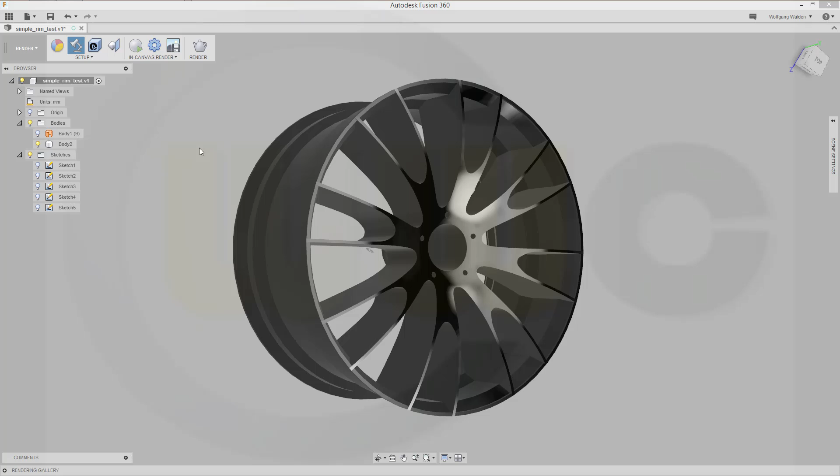I want to do this exercise. I called it a simple rim, and I did it a while ago in other programs. So let's start and have some fun with Fusion 360.

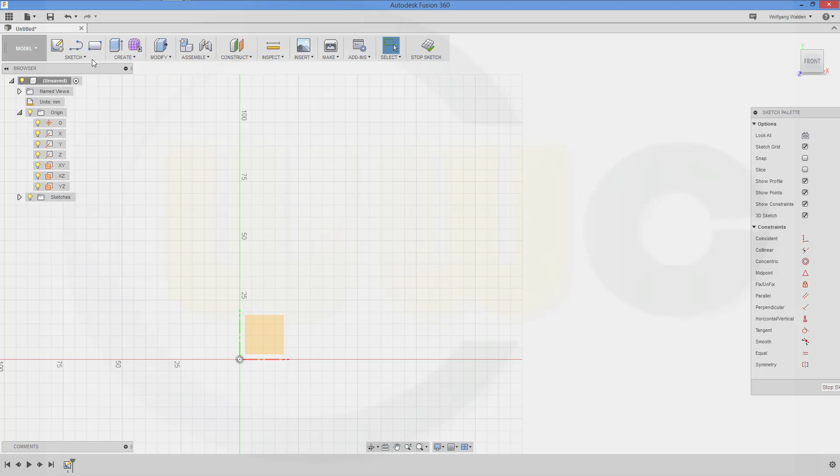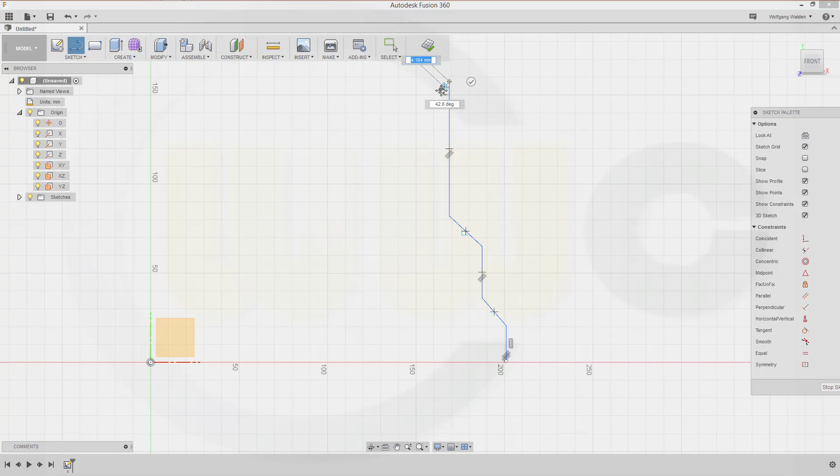As usual, we start with a sketch. So let's go for a sketch on the XY plane, and this might look something like this: up, up, up, okay.

Now let's check that's okay. Give it some dimensions.

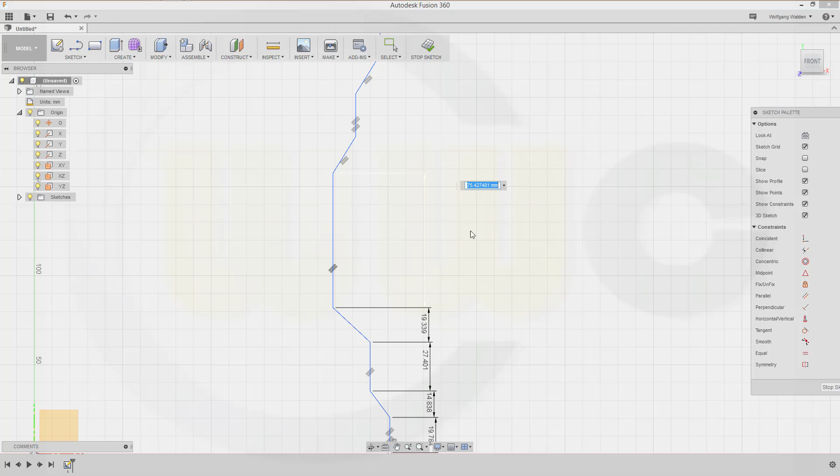Just use the dimension which you just sketched, and I will change them afterwards.

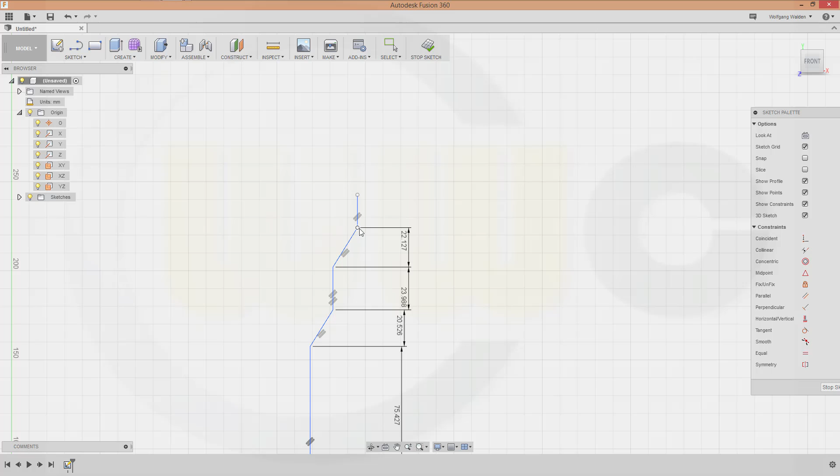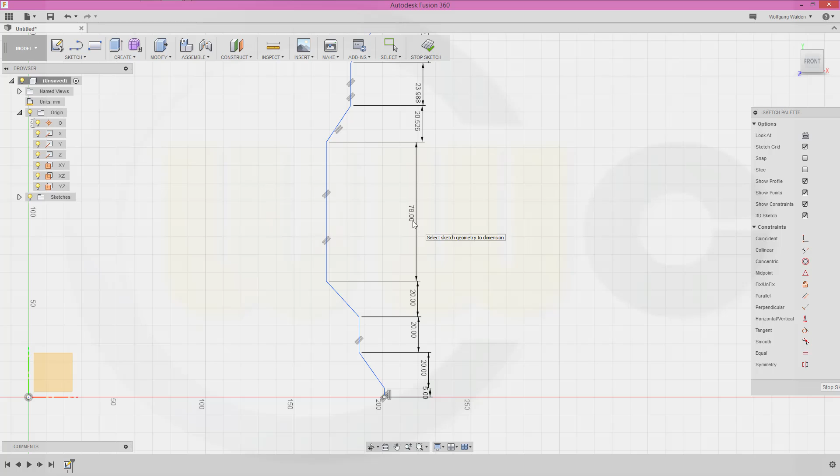Okay, now let's change them. This should be 5, 20, 20, 20, 78, 20, 64, 20, and 5.

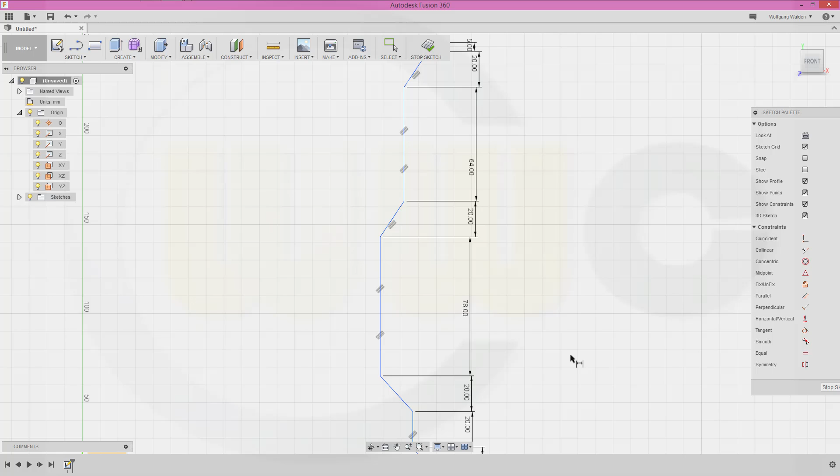Okay, add some more dimensions. Maybe I project that. Oh no, it's okay. So...

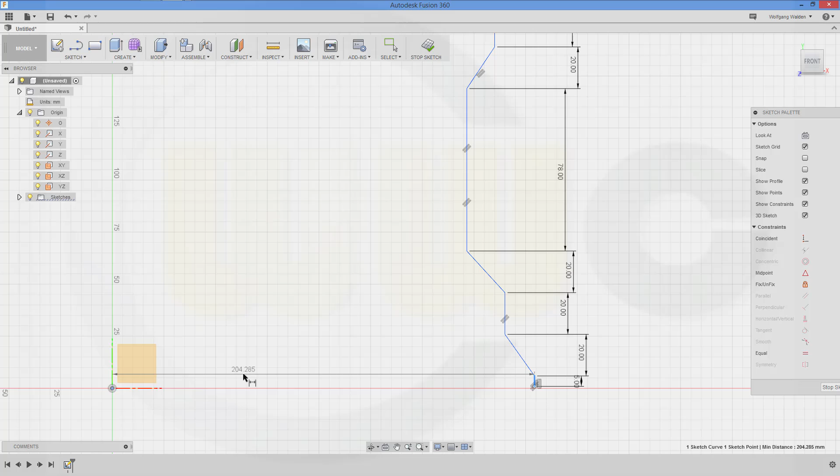From this line to that point, this should be 245. This might be 232.

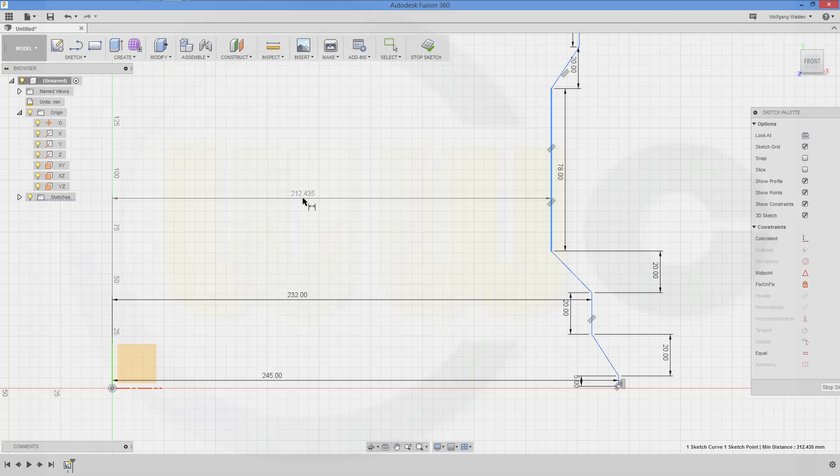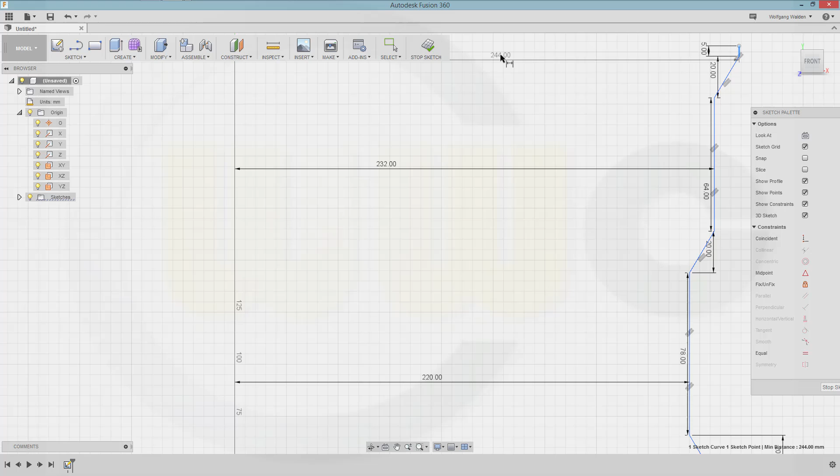This might be 220. This might be 232, and that might be... seems...

So. Let's align that line with this one because it's the same. Okay.

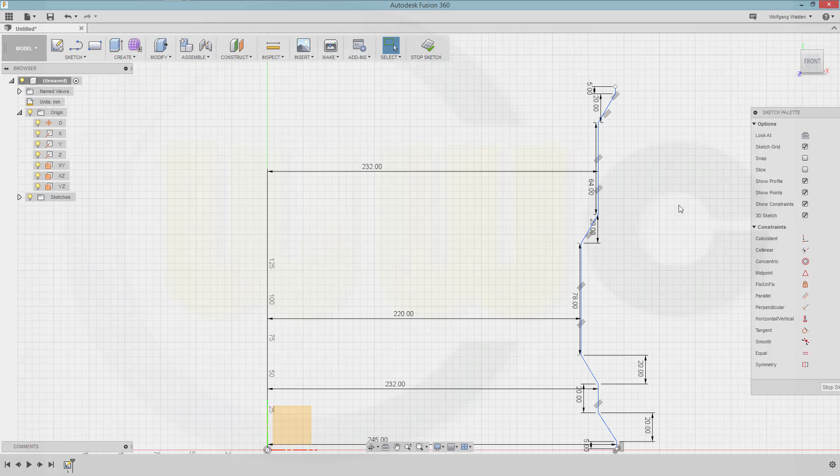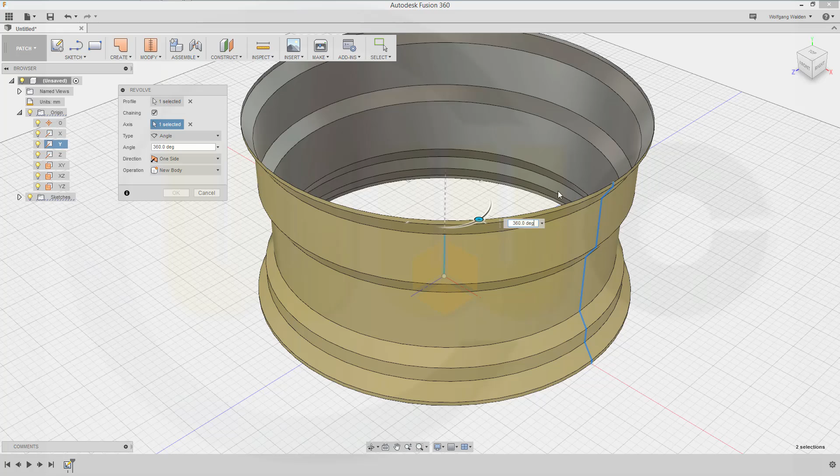Now stop the sketch. I will use patch, go for patch, make a revolve, revolve this profile with that axis 360 degrees and confirm.

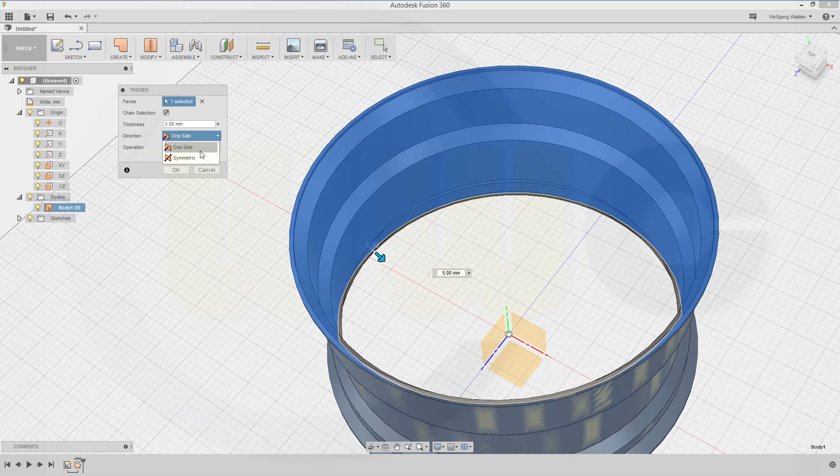Now I want to thicken that, so go for modify, thicken, or just create thicken. There it is, thicken. I want to thicken that body and to the other side. Yes, and confirm.

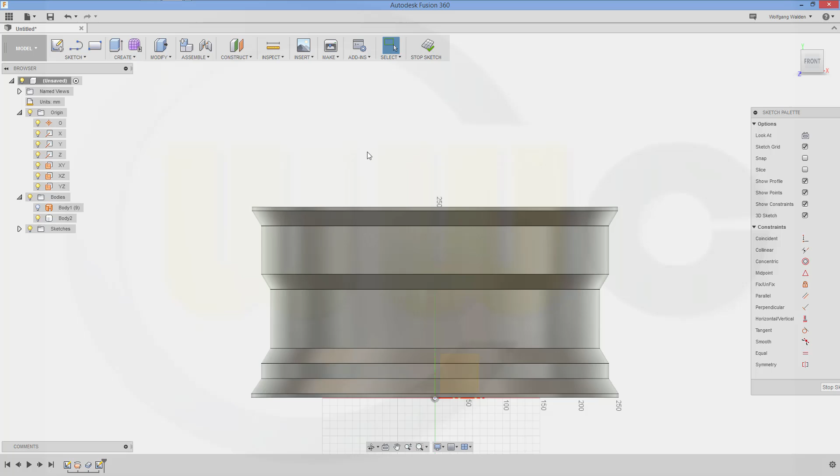Now let's go back to our model. I need a new sketch on the same plane. Sketch on that plane, and I want to have the contour in my sketch, so let's go for project, include, intersect that body, the surface body, and confirm. Let's hide this body.

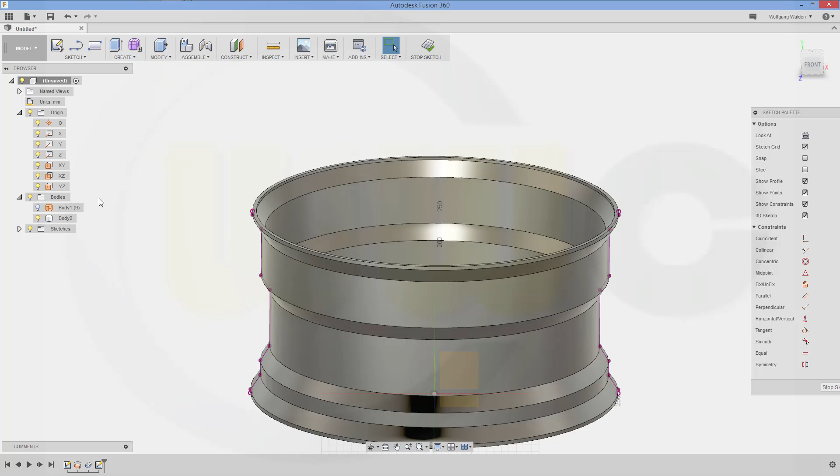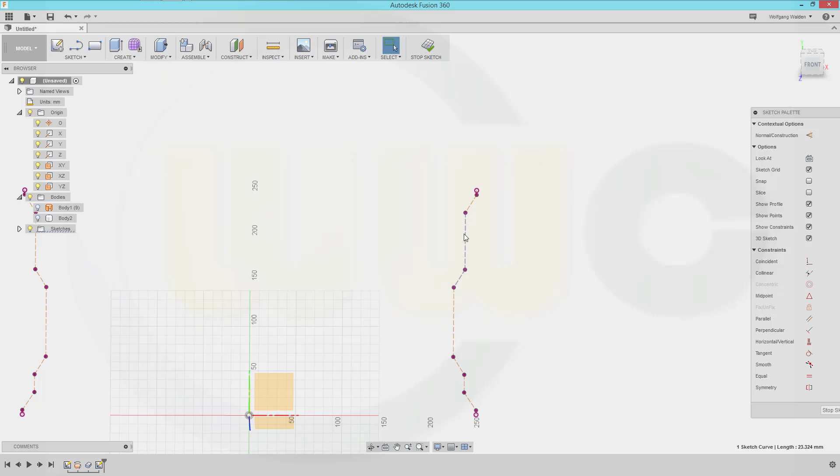And make these for construction only. You could delete this side and this one, that one, and this one should be not for construction. Okay.

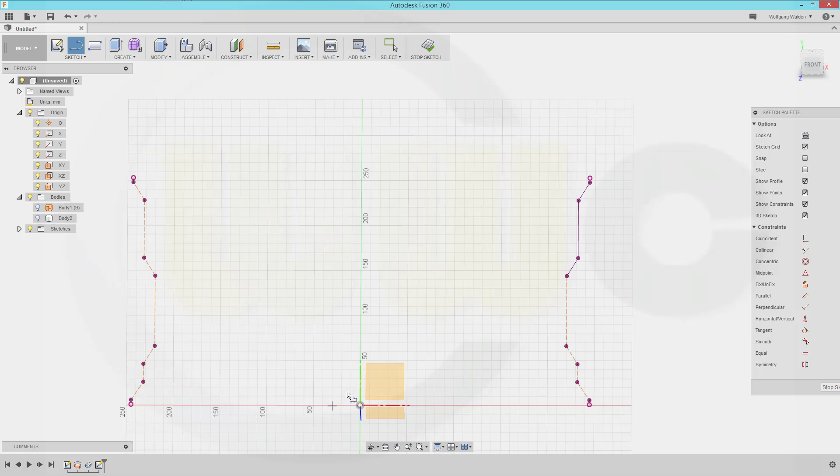I need a line right there. Be like this, and then I would add some splines. Oh, I need another line, maybe like this. Okay, and now some splines.

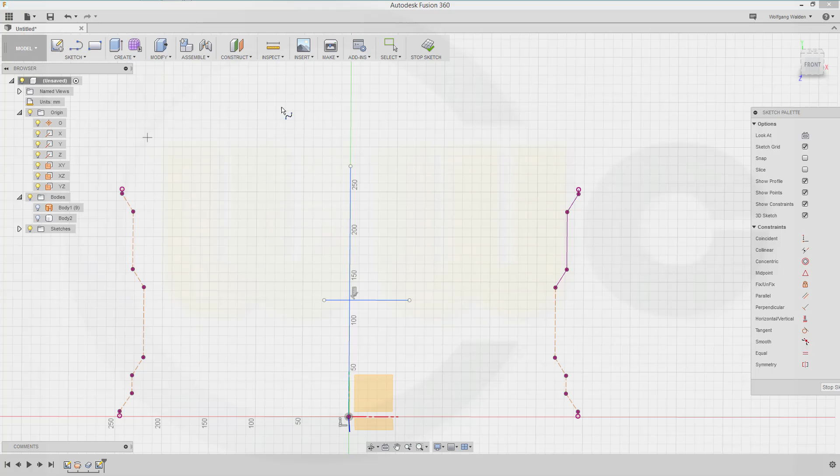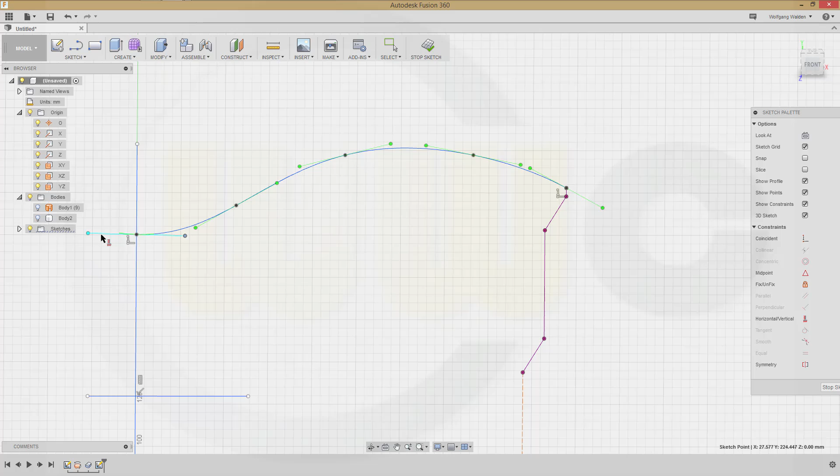One spline which starts right here, maybe goes up like this, over there, and up to this line. Confirm. And this handle should be horizontal, so okay. You can adjust this afterwards.

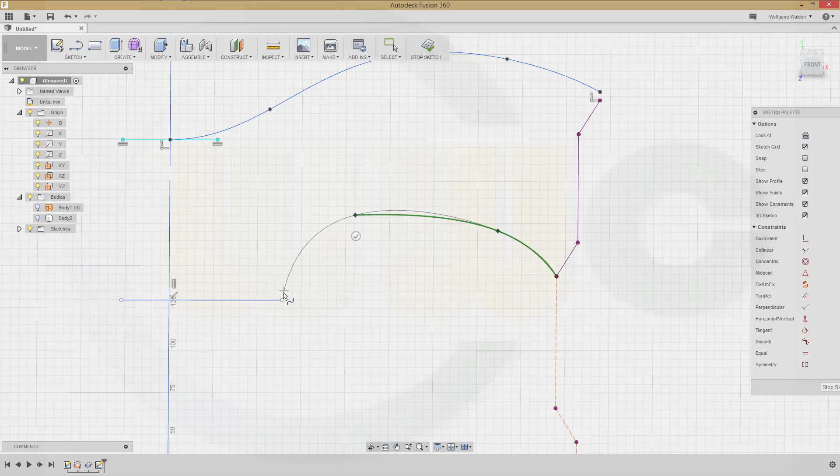Another spline. There you go. Should start right here, go maybe up like this, and here. And this handle should be also aligned, and it should be vertical aligned. So go to this one, select it. Okay.

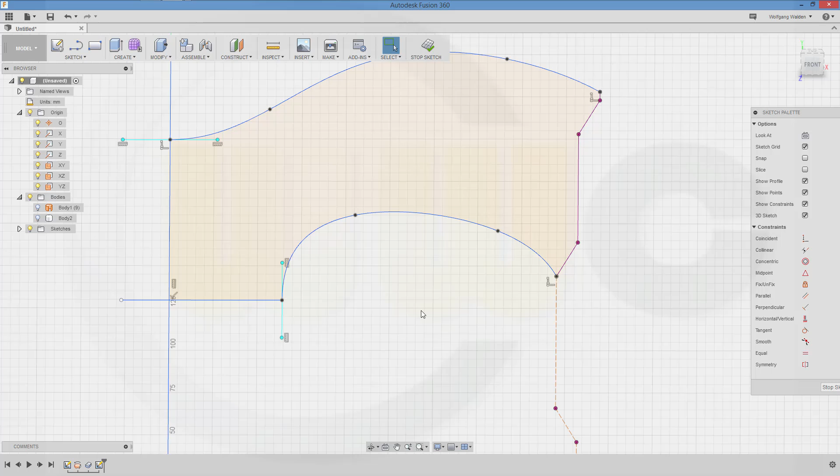Now let's trim. Looks good. Yeah. Stop the sketch and make a revolve.

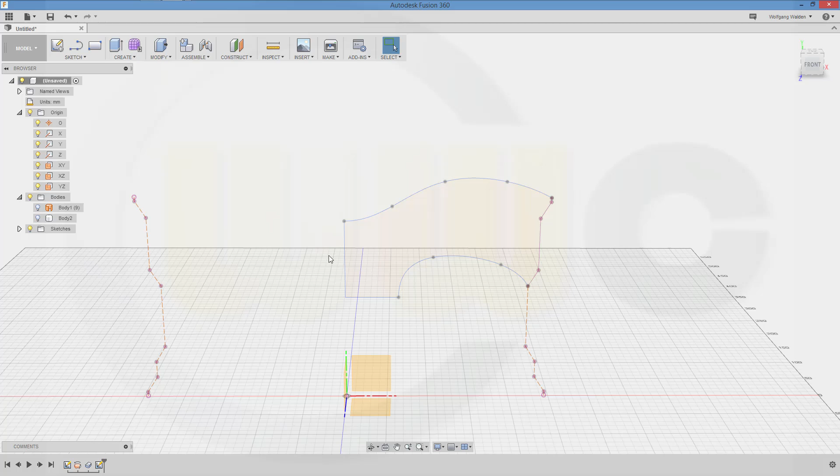So go for create, revolve that profile, and the axis should be, of course, that axis. And okay, let's take a look.

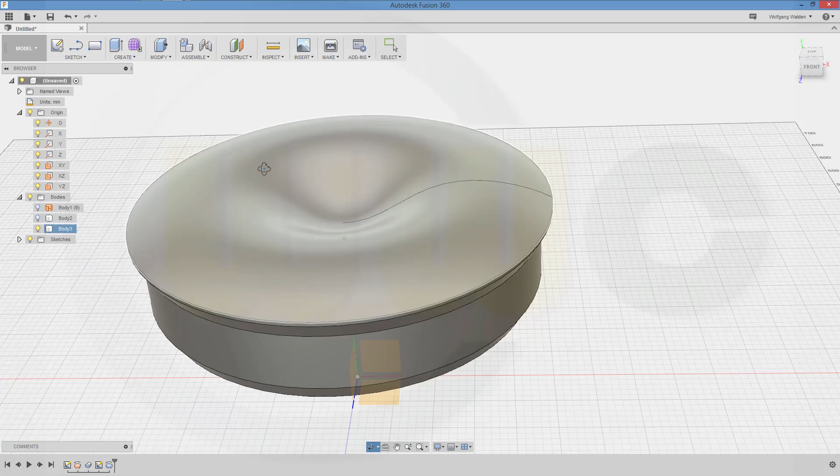Yeah, maybe I could adjust that sketch a little bit. Sketch 2, and maybe move this a little bit up, and this should be aligned as well, so that point should be right above this one.

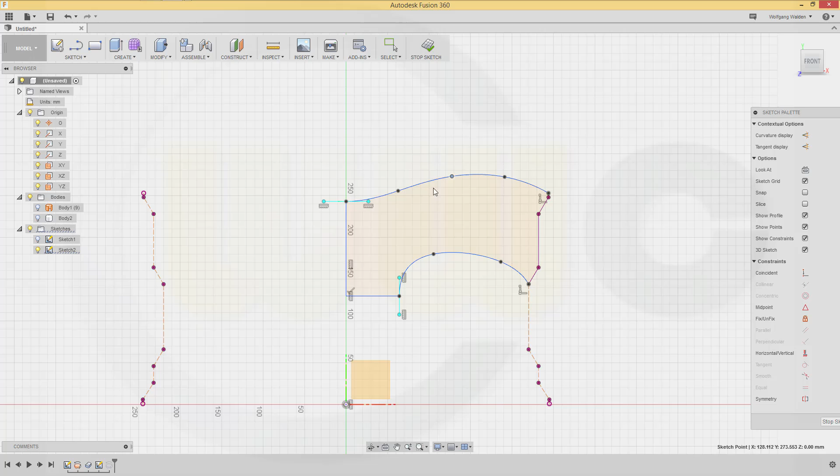And let's move these points a little bit. Maybe like this. Stop the sketch. Yeah, that's okay.

Let's hide this body, and I need another sketch now on that plane. So go for sketch right there. I need a circle.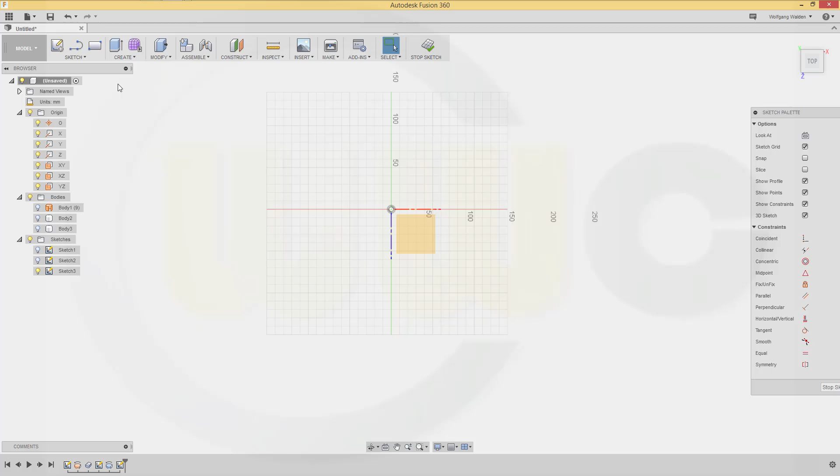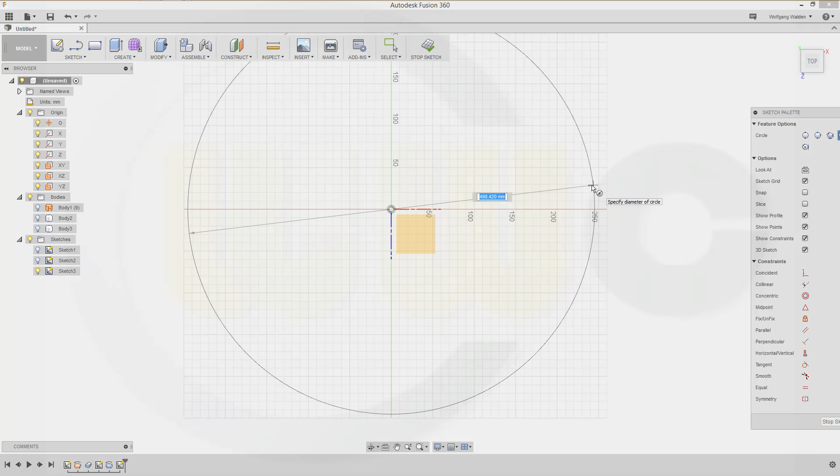And that diameter should be 2 times 2, 4, so it's 490. 490. Okay, and that I need only for construction purposes, so make it for construction.

Then I need another circle which should be a little bit bigger, maybe like this. You could give it a dimension if you want, doesn't really matter. So that's 520. Okay.

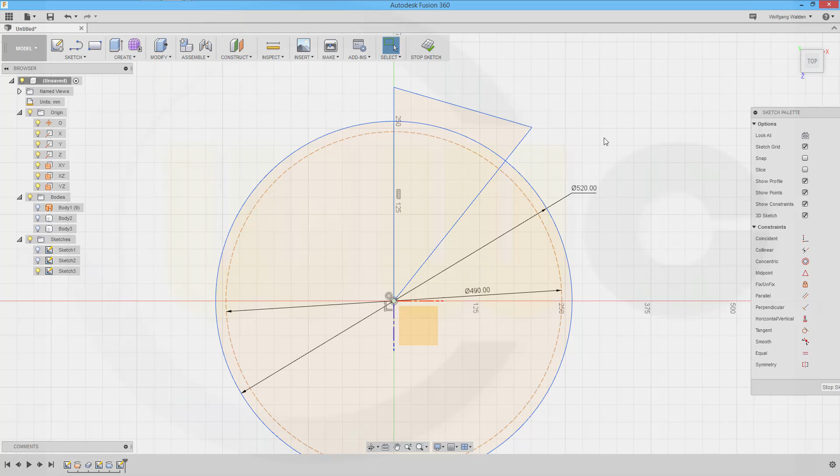And now I need a line which goes from here up, and okay, let's trim, give that angle a dimension. This should be 22.5. Okay, and it should be for construction.

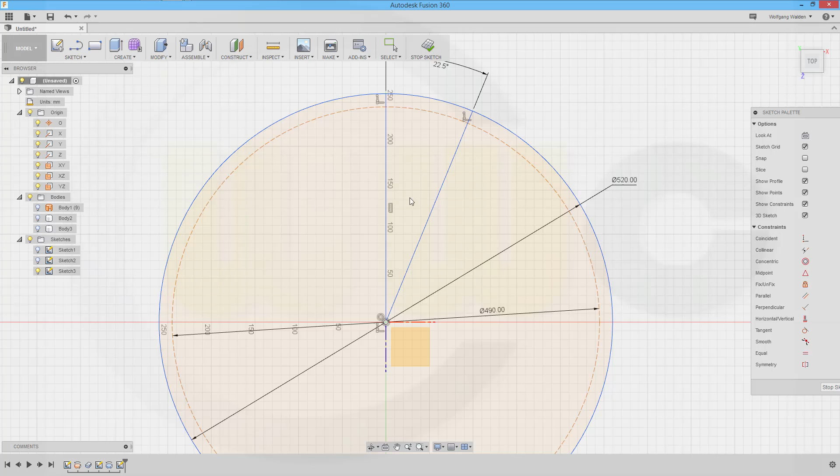Oh no, it's okay. And now I would add some splines. Go for spline, which may start here.

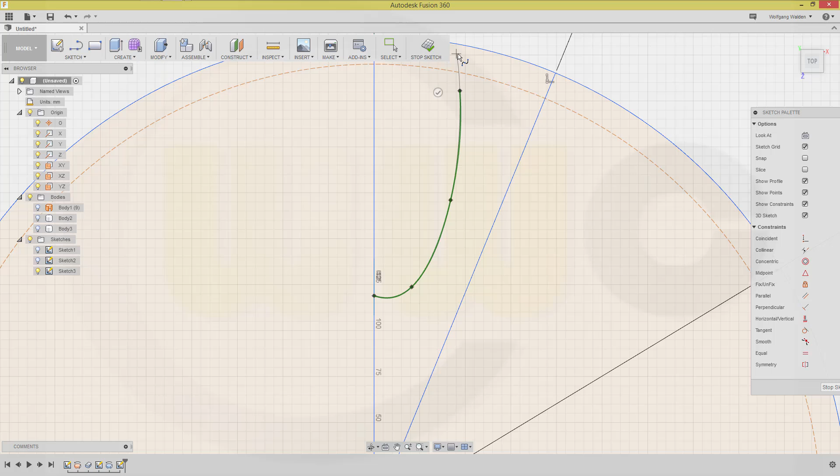And this could look something like this. This should be aligned horizontal. Okay, this could be whatever you want, it could be a 90-degree angle to that, or it could be a different one, whatever you like, doesn't matter.

Maybe move those points a little bit, like so. Then a second spline, which starts maybe here and goes like this. That handle should be aligned and it should be perpendicular to that line, so go for perpendicular, this one and that one.

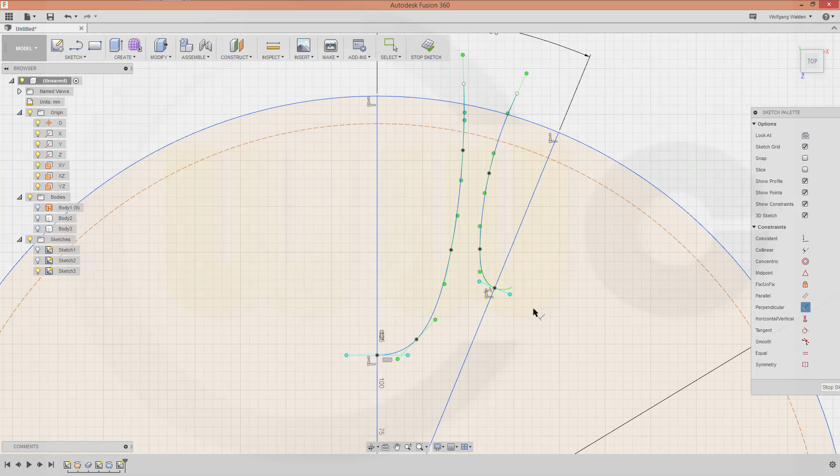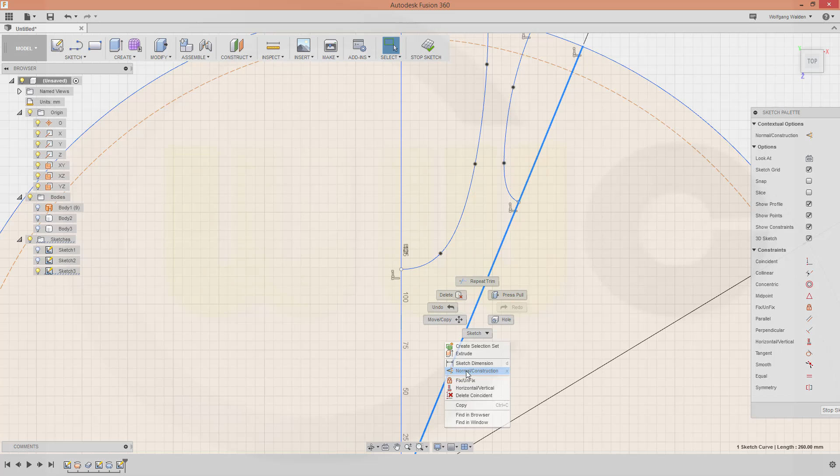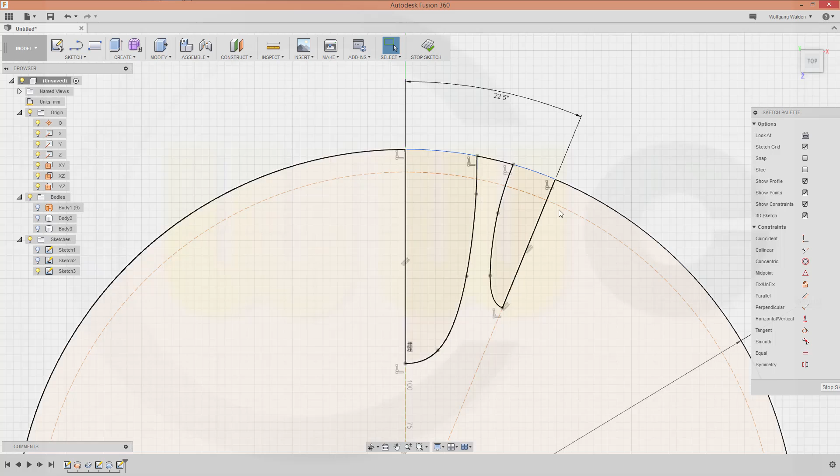Okay, now let's trim. This should be trimmed, that should be trimmed, and I will make these two lines for construction and draw a second line over it from this point to that point, and another one from this point up to that point, and this should be trimmed like this. Okay, very nice.

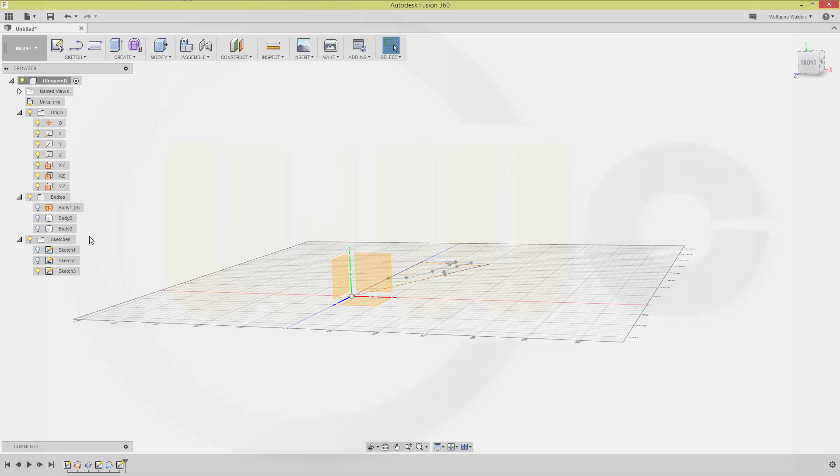Let's stop the sketch and let's make an extrude, which should be up and above that body 3. So let's go for create, extrude, this one, and this should be right above. So that's okay, 300, make it 300 in this case. And make sure it's a new body.

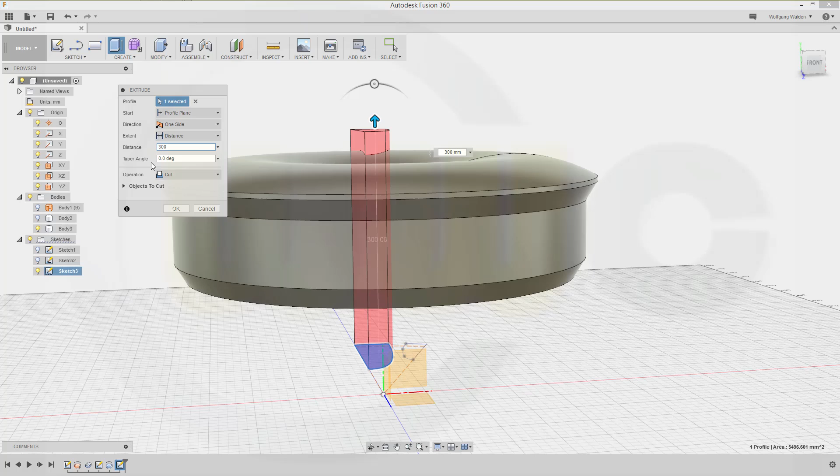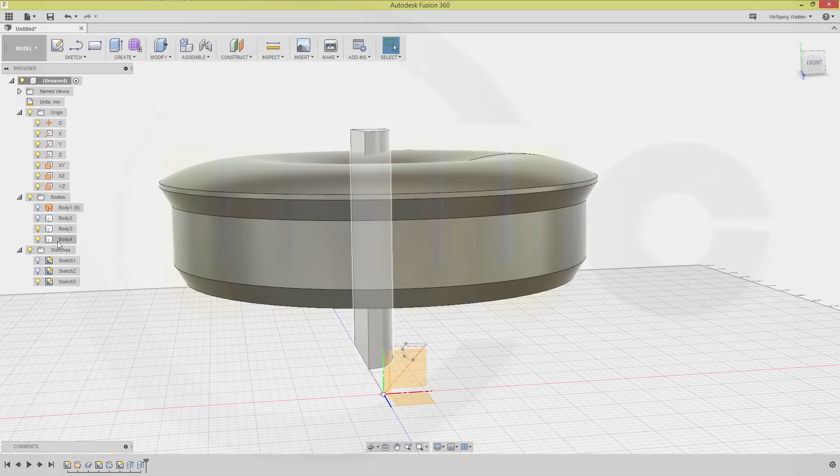Confirm, and another extrude, just show the sketch again with that profile, make it 300 again, not cut. There's my extrude, there it is. It should be, of course, a new body. Okay.

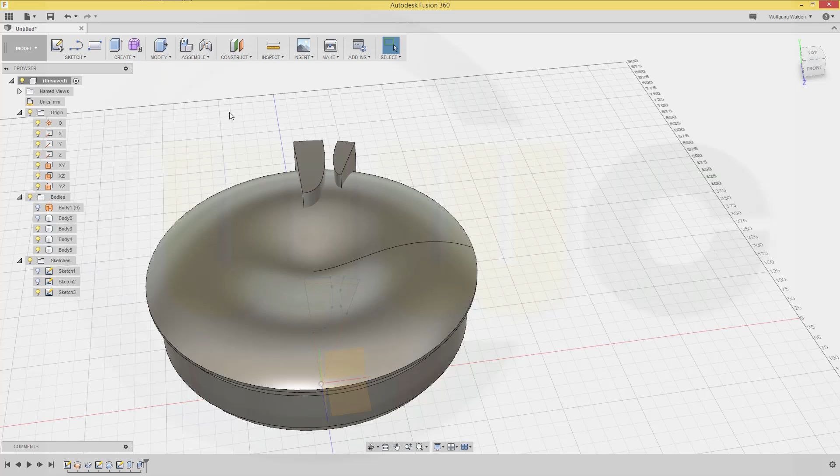Now let's mirror it and pattern it. So go for a mirror, create mirror bodies, this body and that body, and the mirror plane would be that plane right here. Okay.

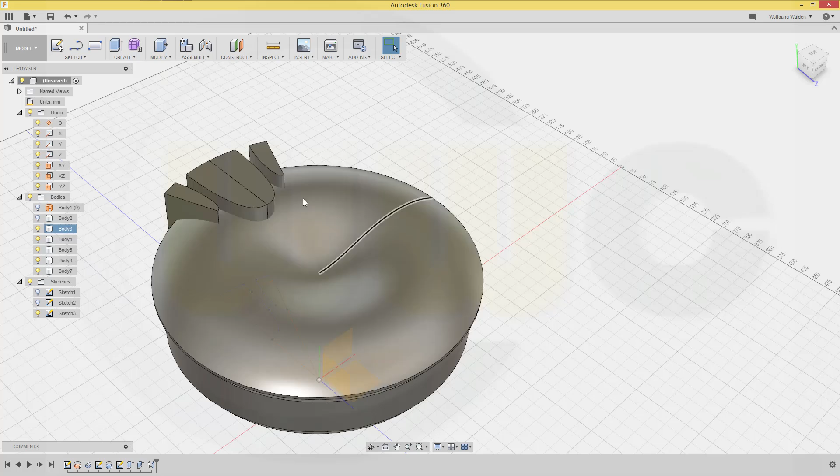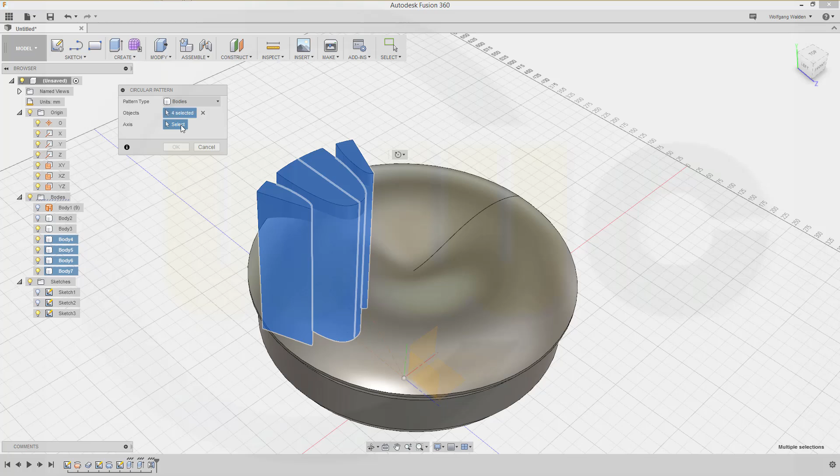Now let's make a pattern with these bodies. A circular one, and I want to pattern not features but bodies. This body, that one, and this one. The axis should be that axis right here, and I need 8 instances.

And okay, so I got a whole lot of bodies right here, but I can't join separated bodies, so I have to do it like this. Scroll down, and now I can remove all these bodies from that one. So go to combine.

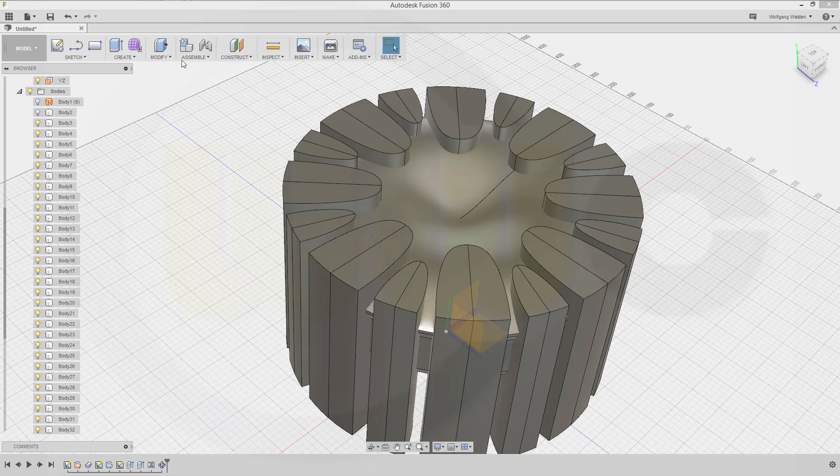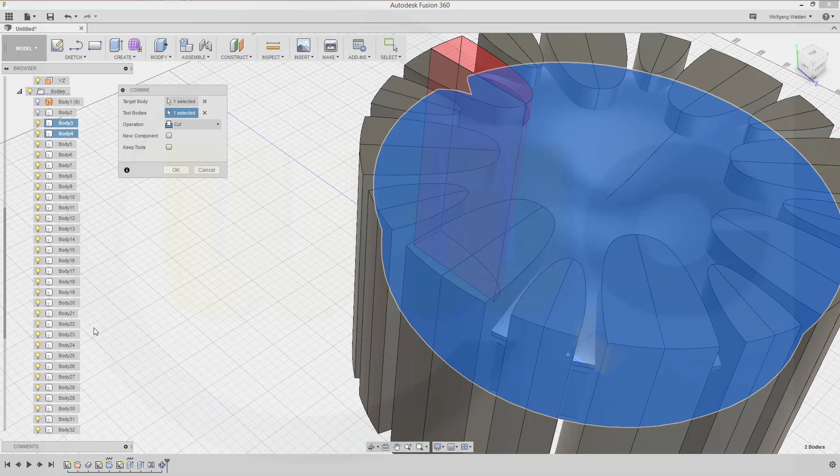I want to cut. The target body is this one, it's body 3, and the tool bodies are all the other ones up to the last one. So shift click and confirm.

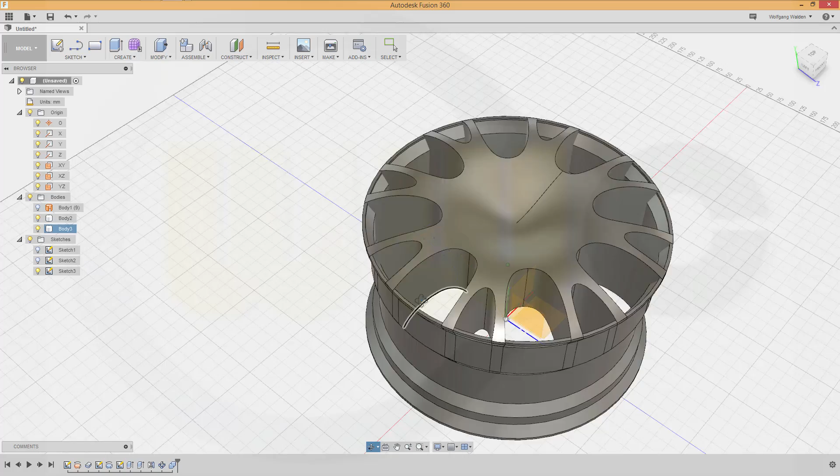Now let's unite or join that body with this body. So go to modify, combine, and join body 2 and body 3 and confirm. And again it switched to, that's really odd, always to cut, and okay.

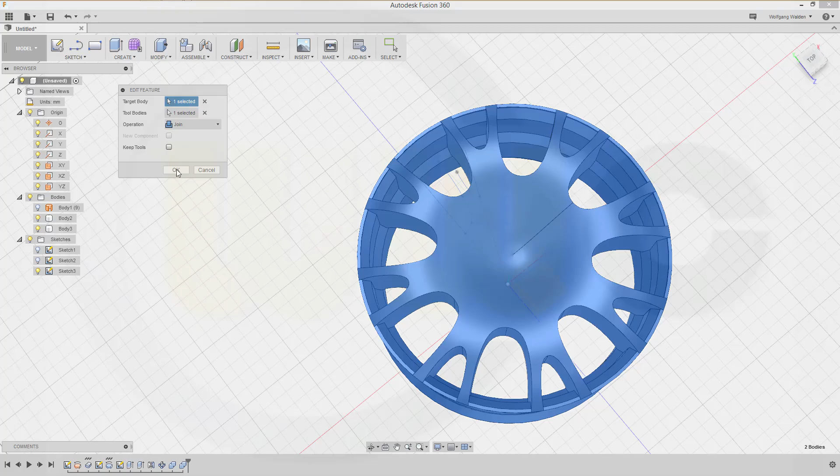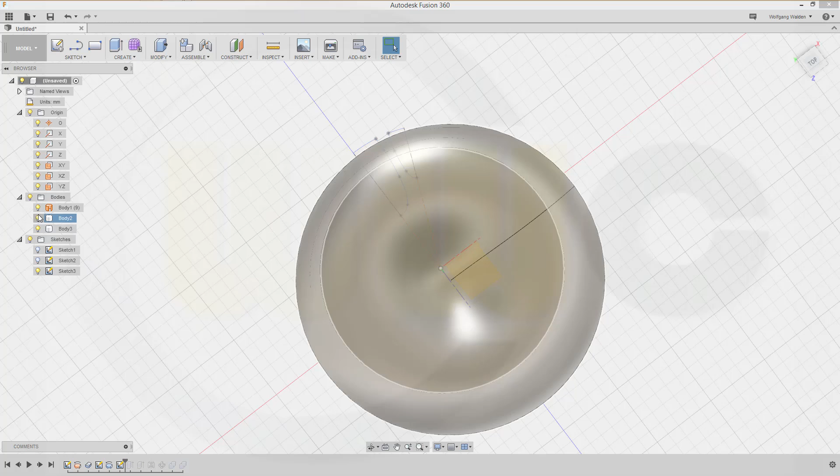Very nice. And I might change these splines a little bit. So go back to this sketch, hide the body, and that would be the sketch.

So modify it, and I would like to move this over here and change this one a little bit, and then maybe move this up a little bit as well, but you have to make sure it stays aligned.

So let's back, and I want this point and drag it a little bit, drag this a little bit over here. Yeah, and seems this was not perpendicular, so make it perpendicular if possible.

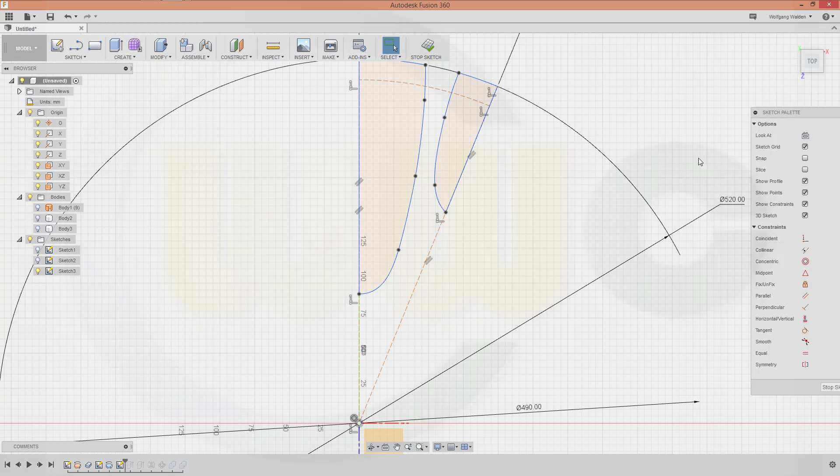Midpoint snap, there it is, perpendicular, and this handle should be perpendicular. Seems I lost it because of the trim, maybe.

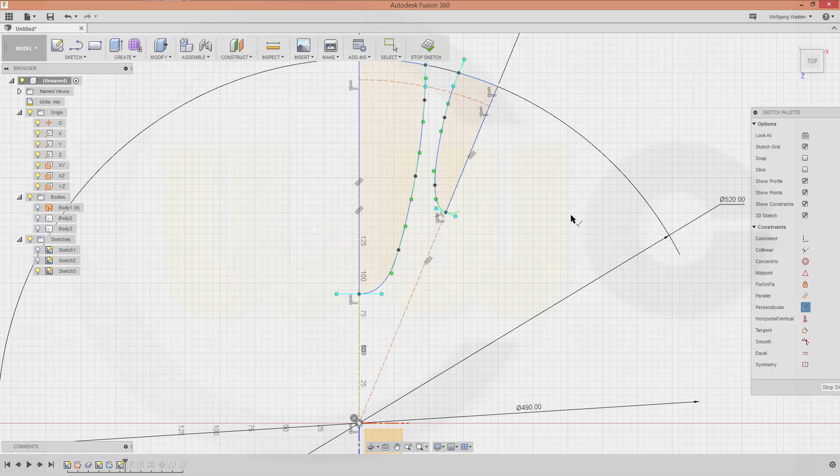Okay, let's take a look. Stop the sketch, move that up and show the body. Yeah, that's okay.

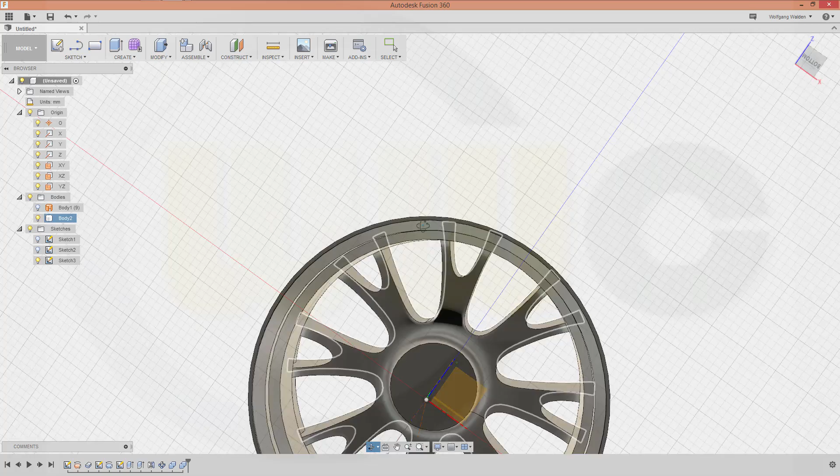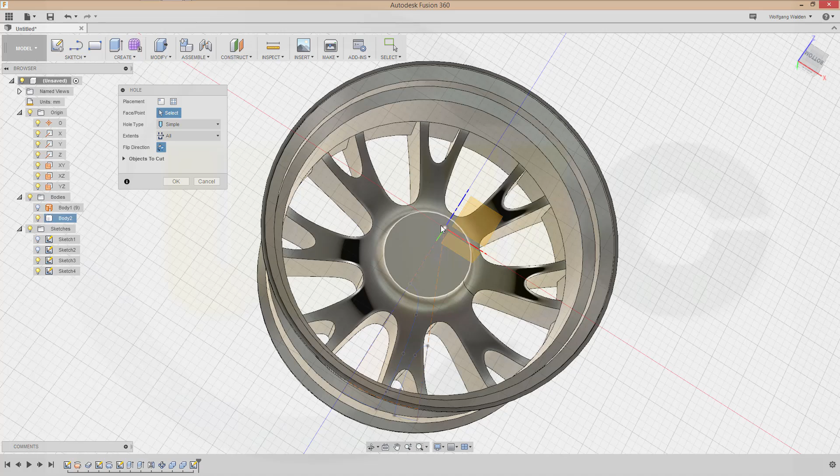Now I need a sketch with a point, so go for a sketch on that plane. That would be a point, because I want to make a hole, so go for point, put it right there, stop the sketch, go for a hole, that's the point, and it should go through all, yes, and diameter maybe 70, okay.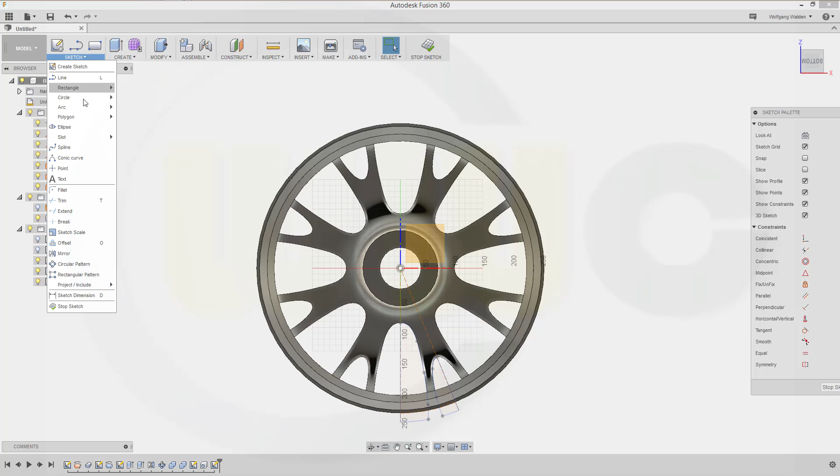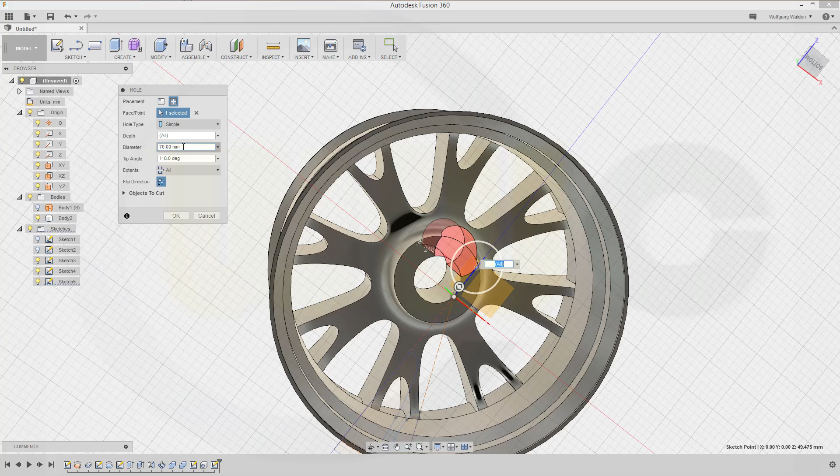Now let's add another sketch and another point, and go for another point, maybe here, just align it to that point, okay, stop the sketch, make another hole, and this might be 10, again through all, let's take a look.

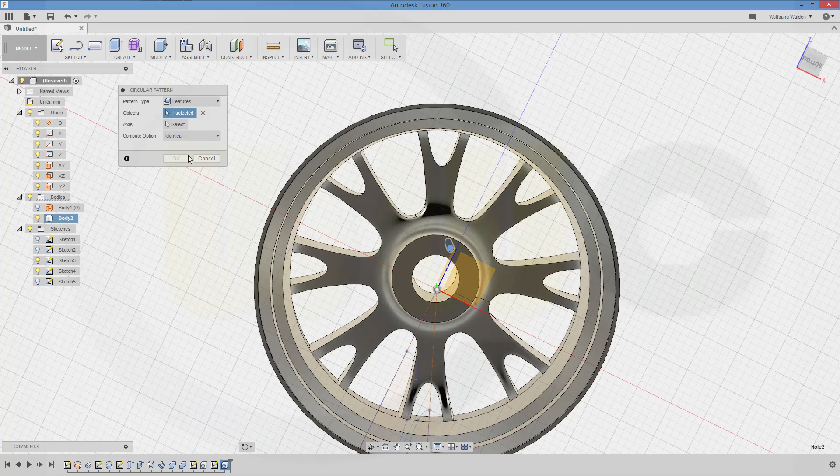Yes, nice, and make a pattern, a circular pattern with that hole, not bodies but features, okay, select the axis, this would be that axis, and I want to have 5 instances. Yeah, it's okay, and I might even change those splines, but I think it's okay.

So hope you enjoyed it.